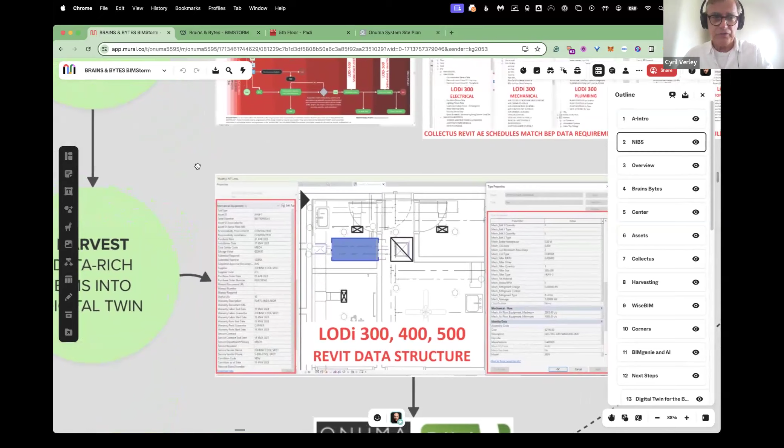But the key here is that it's not just the definition of the data and providing it. There's also a workflow that allows the owner to validate the data structure in the models, to be sure that these data fields defined in the BIM execution plan exist in the model, and that the AEC team members are filling in that data.

Again, we're not talking about LOD 300, 400, and 500 in terms of modeling, it's LODI, level of data information. Once those models are delivered, they are data rich, and they've been validated by the owner without being BIM experts.

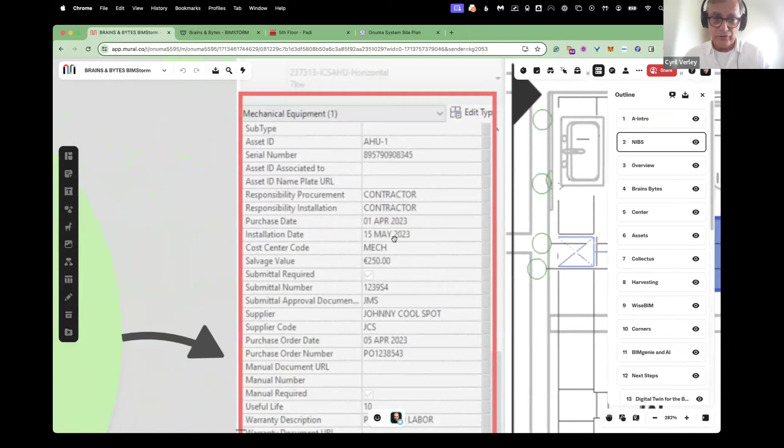And then at that point, that data is harvested into a digital twin. In this example, it's harvested into a Onuma system, which literally takes hours to do the harvesting, locating the assets and all the data that goes along with them. From there, it goes into a digital twin, again a Onuma system.

I think the key here is allowing the owner the ability to navigate through the building with a handheld device, an iPad, whatever it is, but has a map attached to it. That's the key—time and again we see owners trying to maintain their assets and they can't find them on a map because they don't have one easily accessible.

So in this case, the Onuma system with a map on a handheld device allows you to navigate through the building and gather whatever information you need at the fingertips of the technician, the provost of the university, the real estate department, or custodial staff. The group doesn't matter—the key is having a data structure that's open and accessible and based on a map.

That's great, thanks for that, Cyril. One point to make here is that we're showing specific tools, but our focus is always that you should be able to swap these systems out. If a different CMMS system or a different tool is being used, it doesn't matter—the data has to be neutral, which we're heading to with what Anto is going to show later.

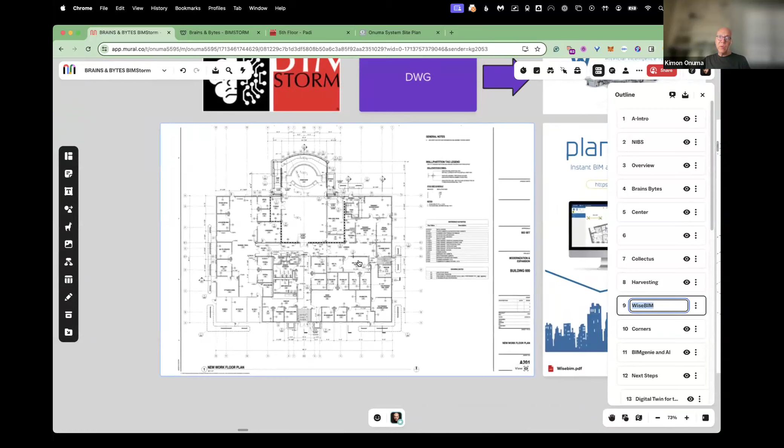So to jump back a little bit now, let's go show a few things. That part of Brains and Bytes was about the use of AI, and we have several examples of other groups doing some pretty interesting things. There's a group from France called WiseBIM, which has an amazing tool that can take a paper, a PDF, a 2D document like this, whether it's a DWG or a PDF plan of a building, and use AI tools to analyze this and automatically generate a BIM within minutes.

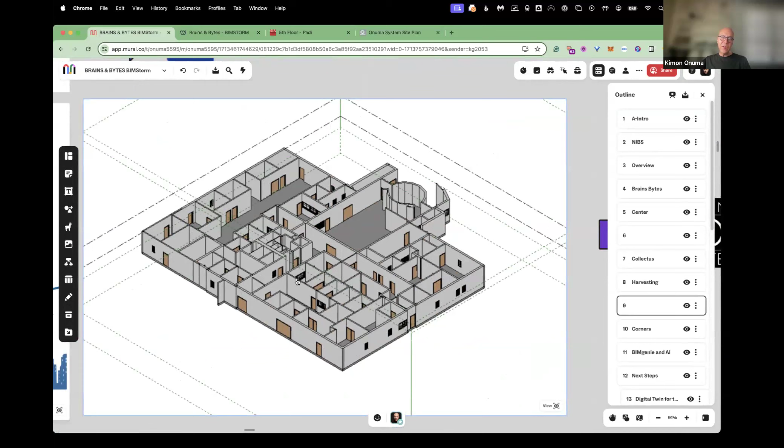Basically, it gets to this point, meaning you can have spaces, and it even recognizes doors and windows. And that can then be used. Now it's an information model that can, in this case, we brought into our system to be able to immediately use in CMMS.

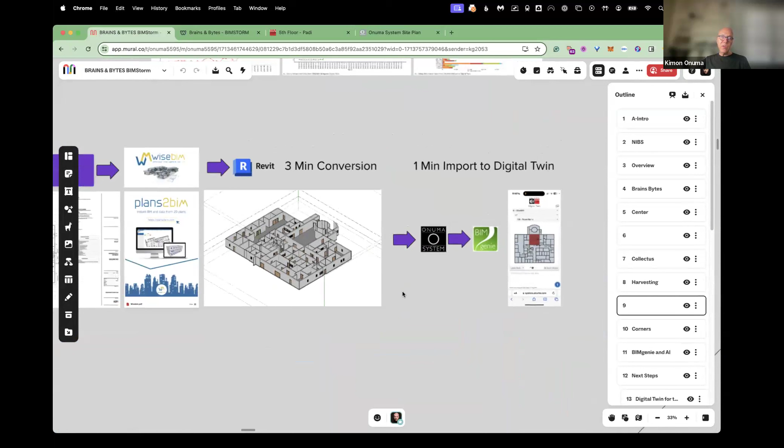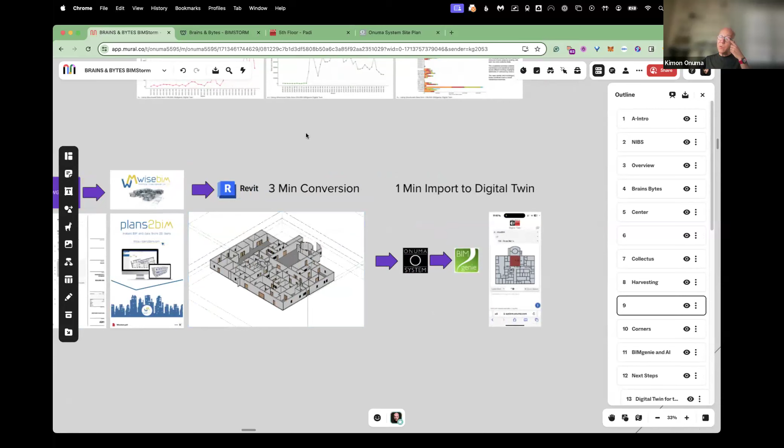So this conversion is one of the efficiencies being gained with some of these AI tools - taking graphical or text data and turning it into models or databases that can then be acted on immediately. This particular building is literally a 3-minute conversion and then a 1-minute import, which could take hours to do if it was manual, and especially on larger buildings, it becomes even more critical.

The other thing we've been testing quite a bit is using the data coming from facilities, for operations, and then being able to use - we're still testing, I think, but it's amazing what you can already do with these types of AI tools. Starting to see patterns from thousands and thousands of work orders, for example, and getting insight into what's going on across this portfolio of buildings with work orders coming in from the occupants of the building, and then being able to act on that, or even use it for generating training material.

So you have all this data coming in, and a point was made in the last few sessions at Realcomm and Monday Live about the standardization of data, and using data from a digital twin perspective is a reason why it's useful for AI. I've presented this before too in other BIMstorm sessions - I think it's one of the best reasons to have some kind of standardization and access to information that can then be used by tools like this. So pretty exciting on that, and there's a lot more to this - a lot of other AI tools are coming out.

It's just hard to keep up with it, actually. There's so much stuff happening.

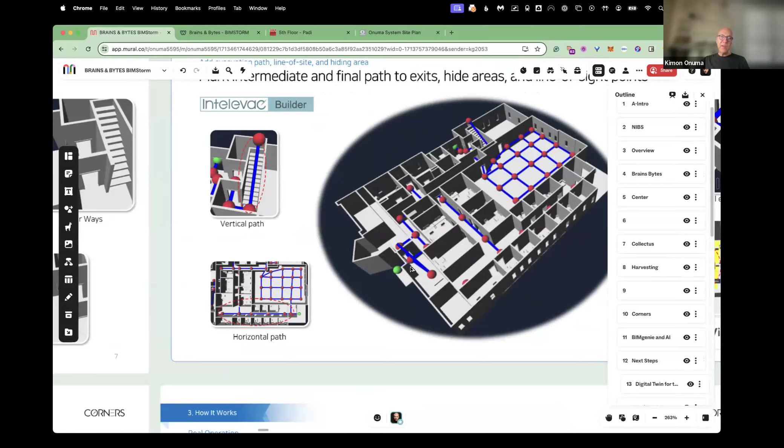One other interesting use case was with Corners Global out of Korea, who used the same building we showed earlier and demonstrated an emergency evacuation system for an active shooter scenario. If you have a model, you can guide occupants in real time with sensors in the building on how to evacuate. Once you have the building, you have the paths, doors, and where people are sitting. With access to sensors, you can guide people with devices that say go this way if something happens in this part of the building. It's a pretty interesting use case.

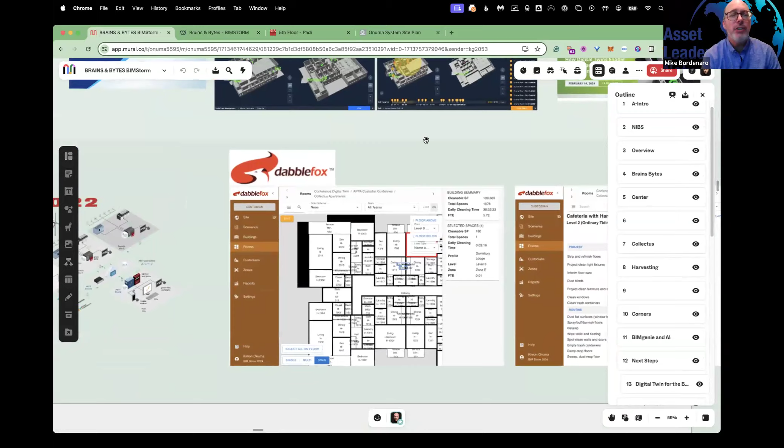They also mentioned that they could lock a shooter into a certain location if they had connected locks that they could trigger from a remote location. Pretty interesting. So there's a lot of other use cases that we captured during the BIMstorm.

I'm not going to go over all of them here, but one we're going to focus on next, as Anto comes on, is about the use of PADI, an Internet of Things collaboration platform that can connect these different digital twins together on the fly. You can build apps on the fly if you have access to the data. So what we set up in the BIMstorm, and through the tools we used, we built APIs so that all the buildings you're seeing here are live on a server on the internet, meaning they're accessible to users to view, edit, and adjust.

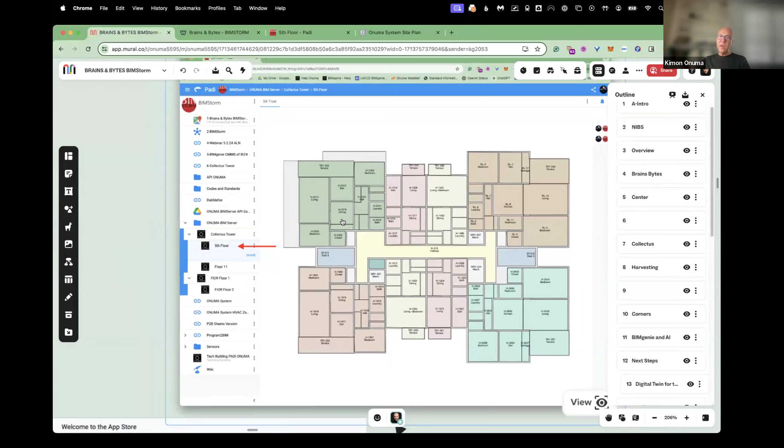You can take a floor plan and adjust it. This is the Collectus Tower, shown here without the furniture. Anto's going to show you other views of the building later where you can turn on the furniture and see what's going on inside it, and build apps on the fly in the PADI system, saying I want to connect this view of the model to a building automation system, sensors, or other systems out there in the model. So the ability to quickly ask, here's a use case, what do I do with the data that's there?

Any other thoughts before we shift over?

There's a lot more material here, but if you go to the BIMstorm site, you can log in and get access to this mural. There are links to this, and some other technical information down below. There are links to a lot of other documents, a lot of the presentation material directly from the mural, and on the BIMstorm site itself as well.

The main thing we need to emphasize is that leaders can specify a requirement for secure open data standards, and Marty will get into the concept of security during the demonstration. But none of this can happen if the owner doesn't require the use of secure open standards from the very start of whatever they're attempting to do. Once you do that, you unlock the capabilities of what Anto will be showing, basically web-based processes.

And we love transparency of data, self-correcting behavior, because it's the asset data. We're trying to manage the assets better. And guess what? It's human behavior that is the issue. It's not the technology, that's proven. It's not the processes, we have success stories all over the place. It's human behavior, and human behavior can be adjusted by leaders who want to establish a culture of continual improvement. And then all these things we're saying you can start doing as you digest what's possible.

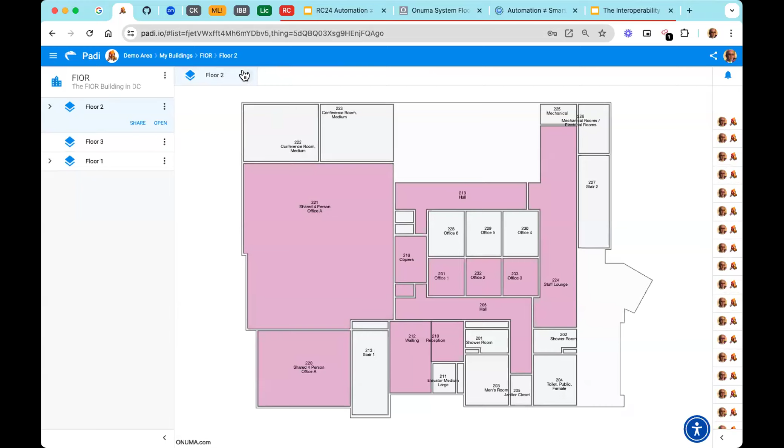I want to show you just one thing. Floor 2, as you see here, doesn't have anything else other than the basic floor plan. So what I want to do is show you how you install things in this platform. In floor 2, I want to install something, and this is the marketplace.

It's where the applications are stored. I'm not allowed to say App Store, but there you go. And like any marketplace, there's different ways of filtering stuff. So if I say I just want the BIM apps, it shows all the various BIM apps.

What I want to do is install this one, the Onuma plan, which is effectively a more detailed view. I do that, and it will ask me what I want to call it. I'll call it details, for want of a better name, but it's just a name, like a name of a file. And it will install that and show the detail view.

So if you notice, I haven't had to configure much at all. The only thing was what to call it. And it knows that it's on floor 2, so it knows to draw the right floor plan. In other words, it knows which part of the BIM model to actually display here in order to display details.

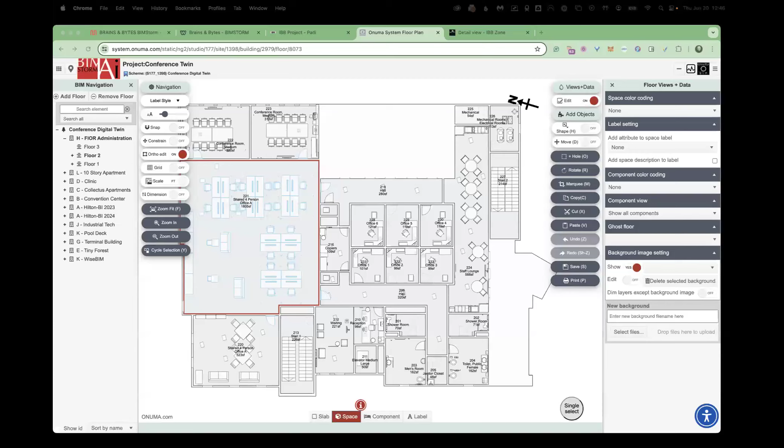Same concept there, we only want to see the spaces. Then we load another app that says now we want to see the equipment. So it becomes a much easier way to tailor the view to the user's perspective and only show what's relevant. In fact, this is a view in our system now, but it's the same view that Anto was looking at.

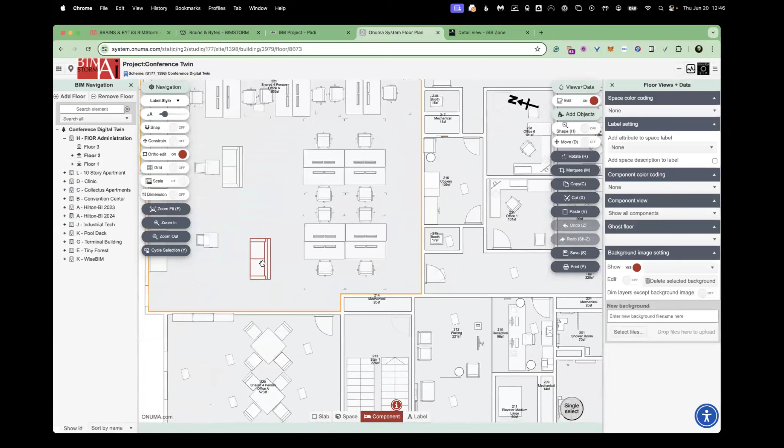And if I said, okay, I want this information about this piece of equipment, or even moving it, I could actually go and say I'm going to update it and change the location. Then you're able to edit it here, and you would see immediately the changes happen in the Padi system as well, without having to understand the entire structure of the BIM for design and construction.

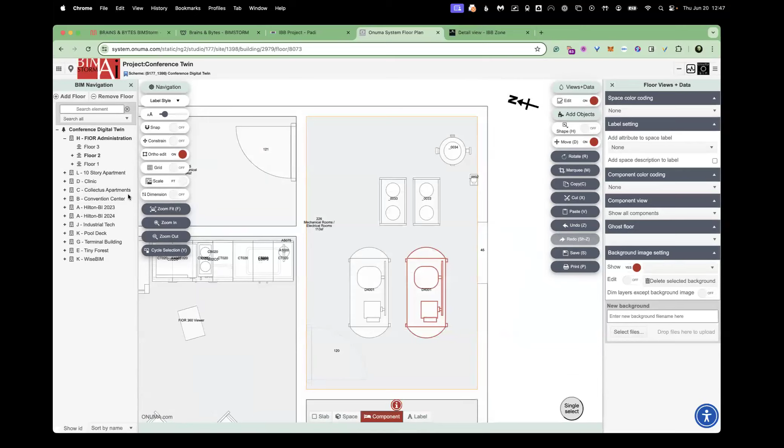I think that's the power of a digital twin: it allows you to move things like assets, walls, occupants, room objects, room numbers, room names, whatever edits need to happen in a planned structure, and then that gets propagated through the entire system. But the foundation is the digital twin.

So to take it back to Guillermo's question, he asks an important question about the workflow, and he's talking about how he's using Revit. This is a good example of why we're the Asset Leadership Network.

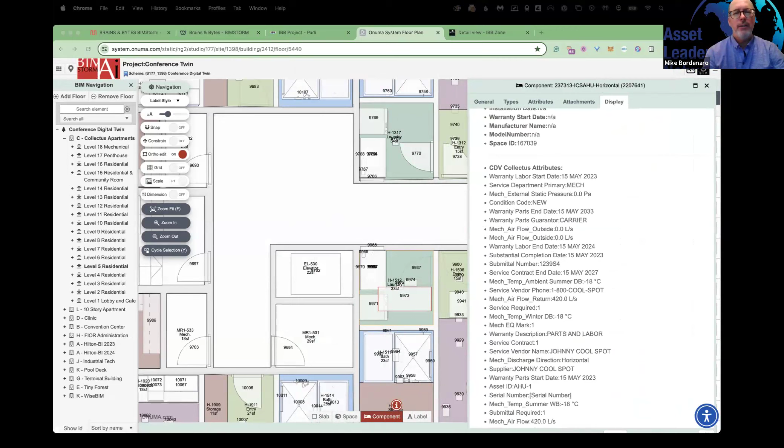Guillermo, you can learn about the workflow a number of ways. You can watch past episodes of the Brains and Bytes workshops we've been having, but really this isn't something for you to do on your own in service of the owner. You're not going to learn how to do these flows unless an owner says, I want the information flowed this way. Since you're working with Revit, you would interconnect with Cyril, give your model to Cyril, and Cyril would harvest the information from your model to use in this process. It's that simple, but the owner has to specify it.

That's the main reason we came to Realcomm, to get that interaction and feedback, and they're starting to realize there is currently a problem, so we're overcoming that.

I think this combination of companies and associations working together to show these workflows is very good evidence for owners that they could trust specifying this approach.

I think that's absolutely the key, is the data structure. We speak with owners all the time, and they'll tell us, oh yeah, we get these Revit models all the time, but we shelve them because the data structure isn't useful. It's not data rich, or it's inconsistent from one model trade to the next, or from one project to the next. Having a consistent data structure from the very beginning is the key. Then from there, the owner can just monitor that data structure throughout the entire design, documentation, construction. And when the models are delivered, they're data rich.

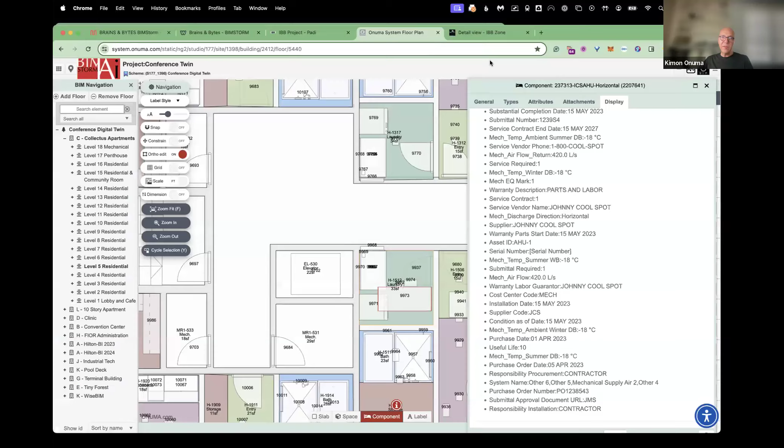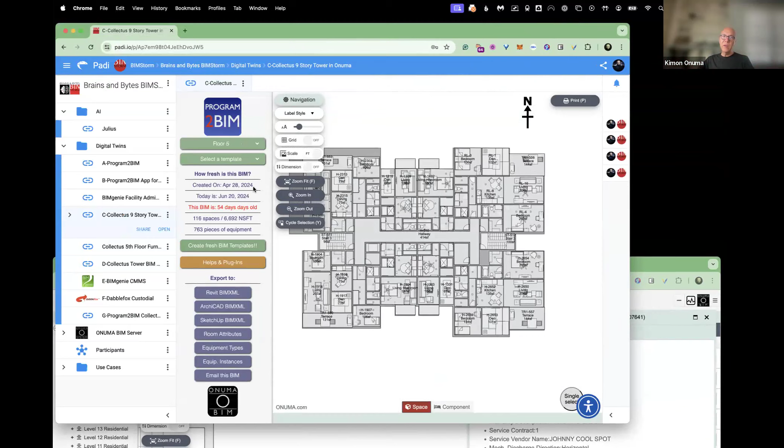I opened up Padi again, and this is another view of the same model. This is more about the digital twin structure of models talking to each other, versus looking at a model view of work orders or the plan view we talked about earlier, or a list of assets and attributes about those assets. There's so many different angles, and a lot of data happening in the background. But with Padi, you're able to focus on a specific use case and what the end user is trying to get to. Do they need furniture plans, or are they looking for the layout of the building for exiting, like the emergency planning we showed earlier? They're all coming back to the same information. You're not duplicating it, you're essentially linking it together. So when you look at the graph view, that's the linking happening throughout all these different portfolio buildings we showed earlier, and what you're trying to get to.

The part that excited me most about this demonstration is how easily you can install new apps. If the apps are available and you want a mapping app, or a BIM related app - here's DabbleFox with custodial planning, and BIMgenie with CMMS. It depends on what you're trying to get to, and then you install that app, and it shows up in the interface, and you get access to it and start working with it. Here's the Tampa model, and we're going directly into the Collectus apartment on the waterfront, getting to the 5th floor, and submitting a request, for example, that would go into the dashboards you're tracking. There's so many different angles to this. But what's typically happening in the industry is these silos are so broken up that you have to export from one system and import to the next, versus plugging these things together and just making them work.

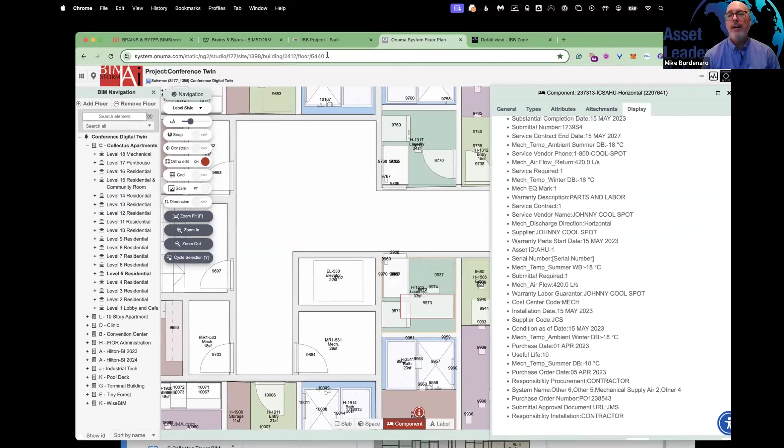Well, I think this has gone really well. We do not need to fill the entire hour. Anto and Rick, do you have anything you can say briefly with your limited bandwidth? I think we've covered a lot. I think this has been really good.

The motivation in a way for doing this is to allow innovation to happen. Think about a software developer creating their own way of displaying a floor plan - maybe it's just different styling, or maybe it shows completely different information. They can do that, and put it in the marketplace, and lots of people can install that very easily on different BIM models for different buildings. So it becomes a way of distributing little bits of applications that do very specific jobs. In my example, to show a floor differently, but it could be anything that would have some value to the owner.